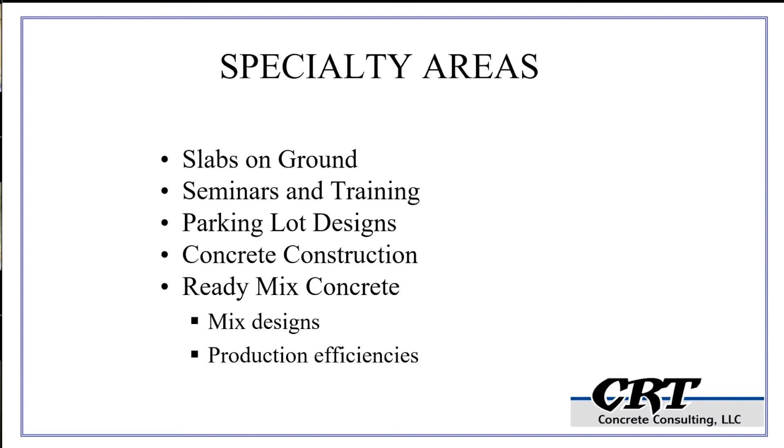Here's my specialty areas, and certainly slab on grade is far and away my biggest business entity. Due to COVID, these big box distribution centers are crazy, out of control — hundreds and hundreds of them being built. I'm working on projects anywhere from Miami to Seattle, California, New Jersey, and kind of everywhere in between. So I do have a myriad of experience. My role on that very rarely is the engineer of record — not really something that I want to do. My services more complement the current design and construction team. So I'm not trying to get into the business segment of some of the good engineers we have on the web with us today, rather just trying to complement what they're already doing.

So we're going to talk about ACI 360. It hasn't been published in quite some time. The current chair is Scott Tarr, and he's working diligently to get a revision out. I've got my own responsibilities as far as that goes, so we'll spend some time talking about that.

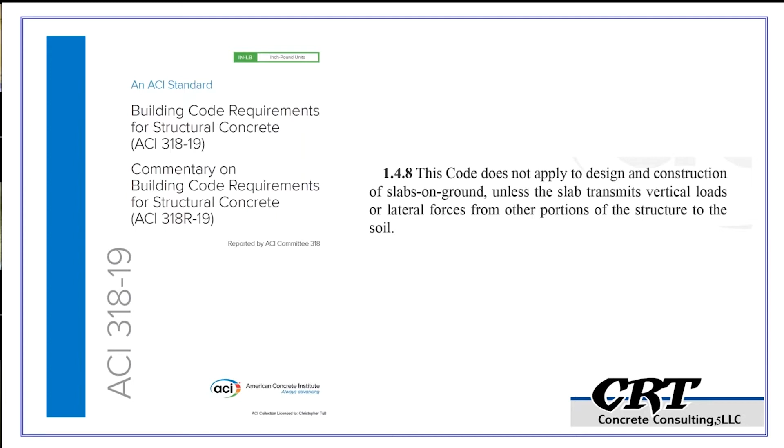But the first thing I want to talk about is ACI 318. Engineers, we love building codes. The first thing you need to understand if you are a designer is that ACI 318 does not apply to the design and construction of slabs on ground unless the slab transmits vertical loads or lateral forces from other portions of the structure to the soil. So we are exempt from the building code. So all you designers who try to put 0.18% steel in the slab and get into a little bit of trouble — don't do it. Put 318 away and come back to our friends at 360. That's where we need to be in designing concrete slabs.

So if you look at the demographics of the voting members of our 360 committee, we've got a good balance between consultants, contractors, designers, general interests, and producers. So we have a very good balance there. It's a pretty good document.

Some of the things in my view are a little clumsy, but Chairman Tarr is cleaning those up, and we'll talk about some of those things as the next version comes out shortly.

Here's the table of contents, and chapters 1 and 2 are the same for most documents, same basic format. We're going to talk about types of slabs, soil supported slabs, and the support system—what we put our slabs on. All our slabs are only as good as what we put them on. We'll talk about loads, joints, design of unreinforced slabs, and design of fully reinforced slabs for crack width control. Frankly, a lot of people get confused and go to that chapter 8 and get themselves in a bit of a bind. We'll make sure we distinguish through those, and I'll mention some of the changes coming up in the current design.

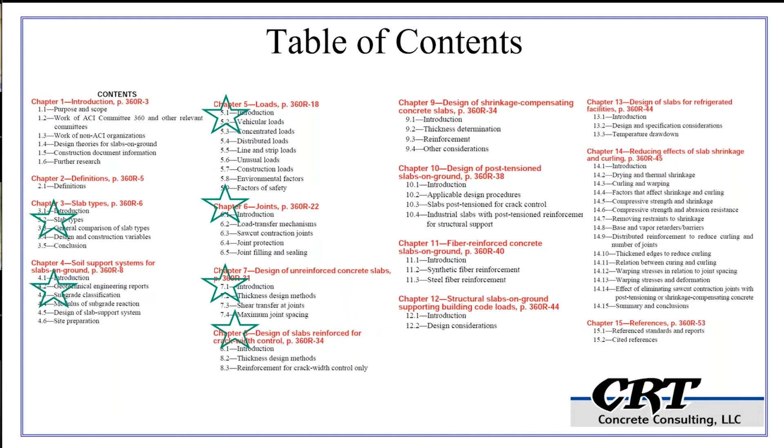So the types of slabs: unreinforced slabs, then reinforced with deformed bars or welded wire fabric reinforcement used to limit crack width control. What's a little confusing about the 360 is if you have shrinkage and temperature steel, light gauge mesh in your slab, you are actually designing an unreinforced slab. That's been a little confusing on some things.

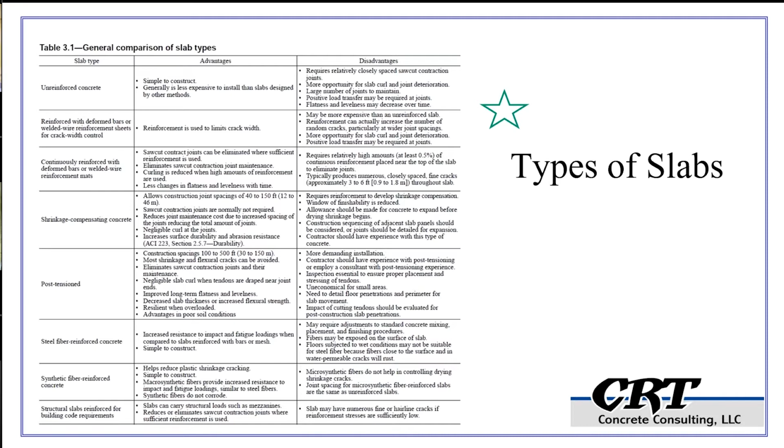Continuously reinforced slabs at 0.5%, we'll talk about that. We're not going to spend much time on shrinkage compensating concrete—those are good systems—or post-tension systems out there. Steel fiber is becoming more and more common, as is synthetic fiber reinforced, macro synthetic fiber reinforced slabs. And then there's building code slabs that hold up mezzanines and stuff like that—we're not going to talk about those today. So those are the slab types in the document.

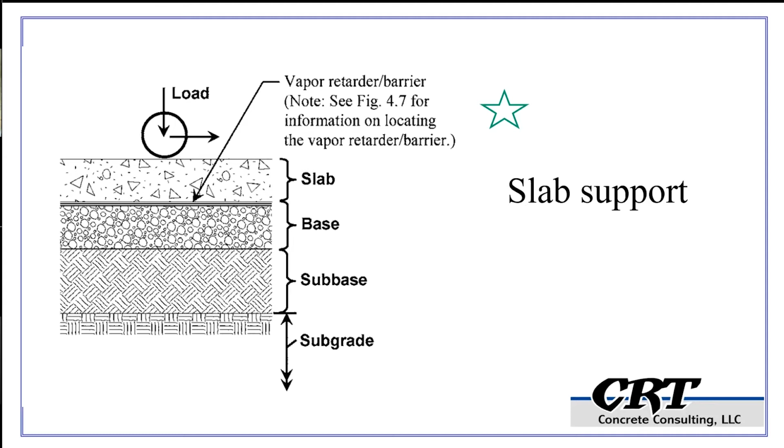Moving forward to talk about slab support, the ACI nomenclature is that the concrete sits on a base, which sits on a sub base, and if you have both, that sits on a subgrade. Most of the time we really don't have two bases—a base and a sub base. Here in Indiana, we might have a slab that sits on some 53 stone, and that works pretty well. More and more often, we're having a vapor retarder under the slab.

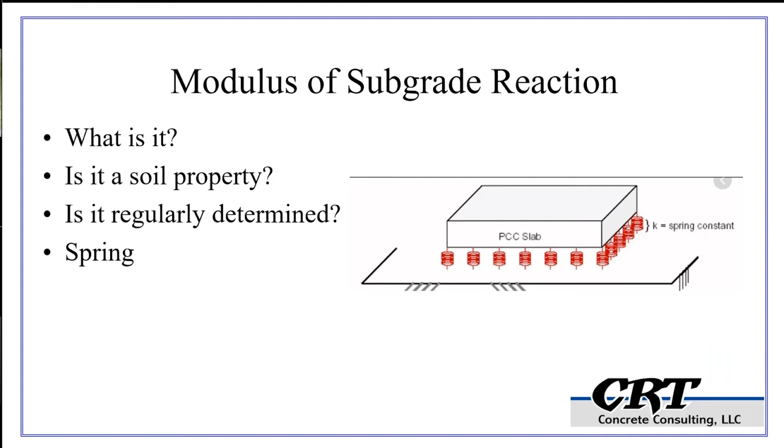Talking about design criteria, the Modulus of subgrade reaction—what is that? It's modeled as a spring constant, like our slab sitting on springs. Do we test for that? No, we don't really test for it. We have some soil properties with associated typical Modulus of subgrade reaction values. A K value of 100 PCI, or PSI per inch, is pretty common. I'm not too concerned with what the exact value is—I'm more concerned that we have uniform support under our slabs, that we don't have a lot of rutting as we go through that.

On vapor retarders, we talked last time in 302 that they're becoming more and more prevalent. I think you're going to see all these warehouse slabs entirely on vapor retarder. One of my biggest clients, that's their standard operation now—the concrete slab sits on a positive vapor retarder to take underlying moisture out of play. We have a nomograph, a flow chart, to find out if you need the vapor retarder. But if you're storing product on the slabs, and more of these DCs have cardboard boxes directly on the slabs, that's why we're putting the vapor retarder in there—to take vapor transmission from the soil out of play with a positive vapor retarder.

There are some pros and cons to doing that. The old thinking was curling was more on plastic—I'm not sure that's true. Curling is more a function of moisture gradient, and I think we're choosing sites now that we passed on 20 years ago. So if you're on a wet site, which we very well may be, your moisture gradient may go down with a vapor retarder, not up, and in fact your long-term curling may be less.

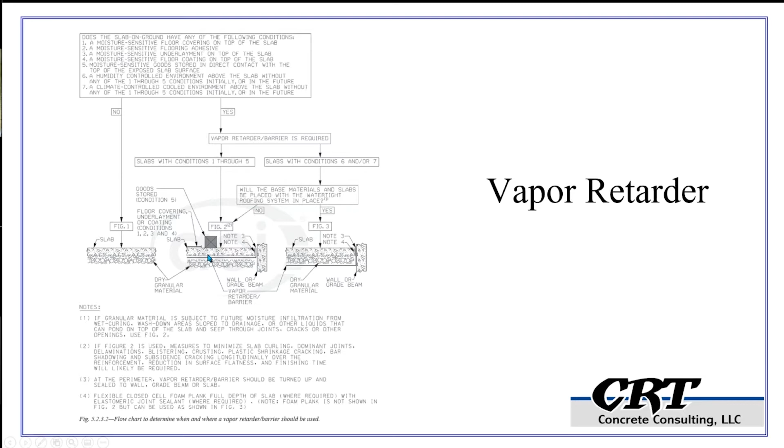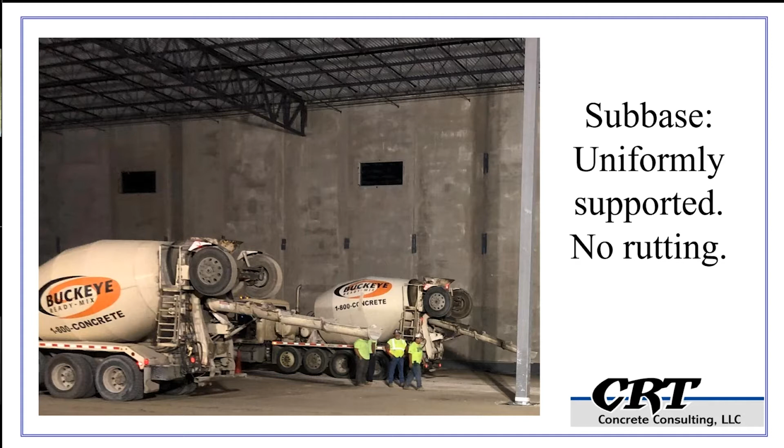So notice that we do have these things, and when we have them we're trying to put the concrete right on top of the vapor retarder. I showed this slide last time, trying to take some out-of-state trucks so I don't show any favoritism to all our friends in the ready-mix business here in Indiana. But we want these trucks moving around on these sub bases without a lot of rutting—uniformly supported, that's good, and that's kind of what we need.

If we look at the subbase issues, there are some issues around the country, maybe not so much in Indiana, but expansive soils can be problematic, moving around, shrinking and swelling with moisture content. There are some large fill sites. Even if you put in your fill in compacted layers, you can have long-term consolidation of those fills, and we need to monitor and measure those.

We don't have a lot of slope slabs here in Indiana, but if you get into northern Kentucky, I worked on a million square footer that had a whole bunch of cut and fill, and they sloped the slab 0.5%. The slab was tilted 6 feet from one end of that big sucker to the other. That can be easily accommodated. One direction slope is not that big a deal, you can't even see it. So that's the subbase issue.

Again, we want it to be uniformly supported. We want to pick an appropriate K value. If you tell me it's a K of 150 or a K of 100, I'm not going to argue with you, those are pretty much the same to me. If you tell me we have a K of 500 or 600, I'm probably going to question that a little bit and find out how we're getting there. Do we have some sort of chemical stabilization, cement stabilization? That's a very high value, not typically seen.

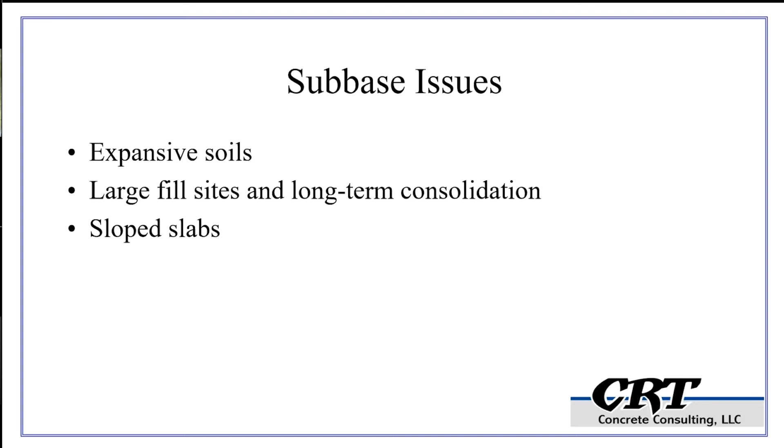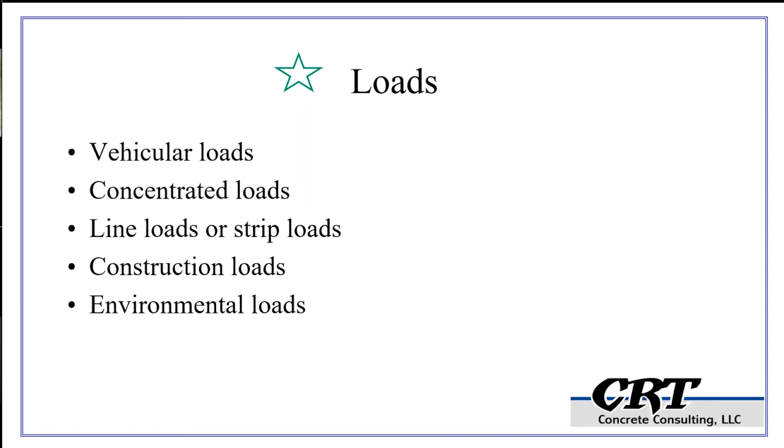If we took a look at the loads, we got a bunch of different loads that we can have on these slabs - vehicle loads, concentrated loads, line loads, construction loads. That's interesting, construction loads not something too well thought out, and I have a couple examples that I can share on how construction loads can get you into a bind. Environmental loads, these are shrinkage and warping. Thermal loads can be significant on some of these slabs, so we'll chat about those a little bit.

So what are the loads? Do we know them? If we're building 750,000 square feet out in Plainfield, do we know the loads that are going in there? We may not. Do you design that slab? Most of the time in Indiana, these warehouse slabs, they're 7 inches yesterday, they're 7 inches today, and they're 7 inches tomorrow. Not a lot of thought gone into some of these, kind of a clear height thing - if the building's this height, we're going to have a 7-inch slab.

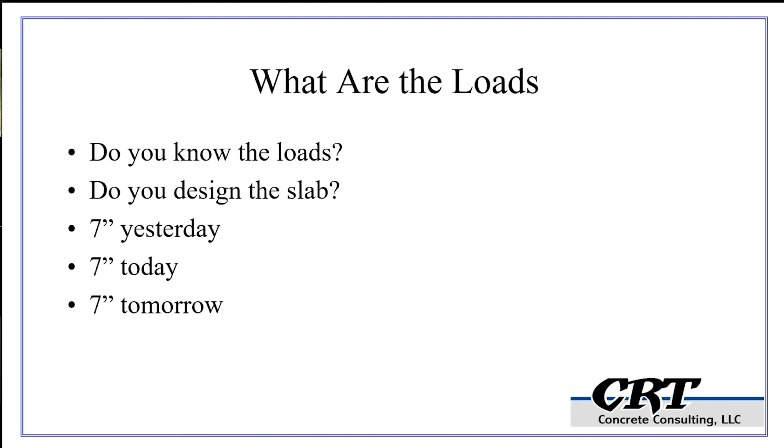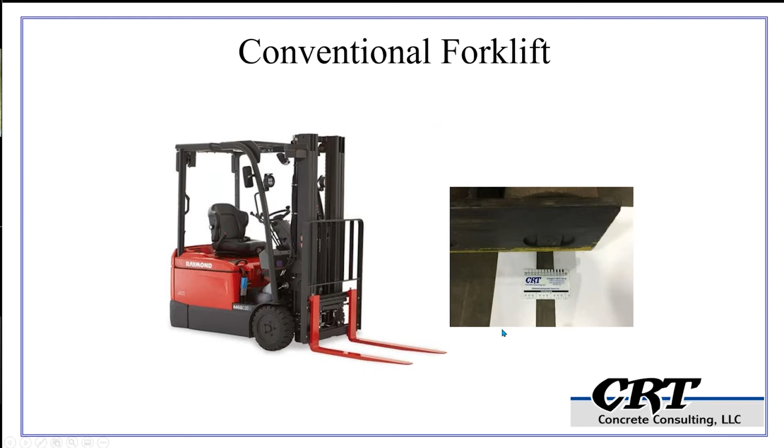So the thickness does depend on the loads. If we talk about these different loads, we look at some of these fork trucks, and if you measure the contact area of these pneumatic tires, not too bad. But if you get into some of these pallet jacks, where we might have a half inch contact area across 5 inches of a very hard plastic wheel, these things with some big loads can play hell on some joints. We're getting these fork trucks that go faster and faster, carry more and more weight, and have harder and harder wheels that can create durability issues on joints and slabs. So we got to understand those things.

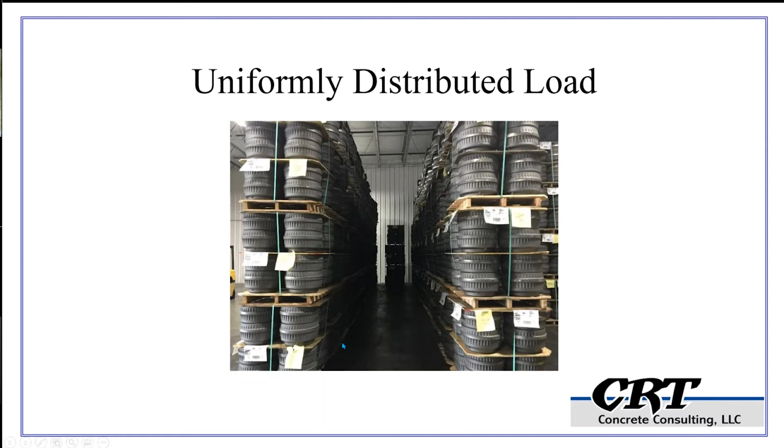We have uniformly distributed loads. This is a project I worked on down in Tell City. The owner of this facility was under the belief that when these brake discs fell over - 1, 2, 3, 4, 5 pallets high - a whole row of this stuff fell over and it chipped the slab. He did not think that his slab should chip simply because these cast iron brake discs hit the floor, but they did. So you can have some uniformly distributed loads there, and you might have some tension in the bottom of the slab underneath these loads, and tension in the top of the slab in between these loads.

So you got to check and see the loads and what you have on each portion. If you have too much tension in the bottom and you get a crack here, no one's really going to complain because you can't see it. But if you get something in between here, then that could be something that you have to deal with.

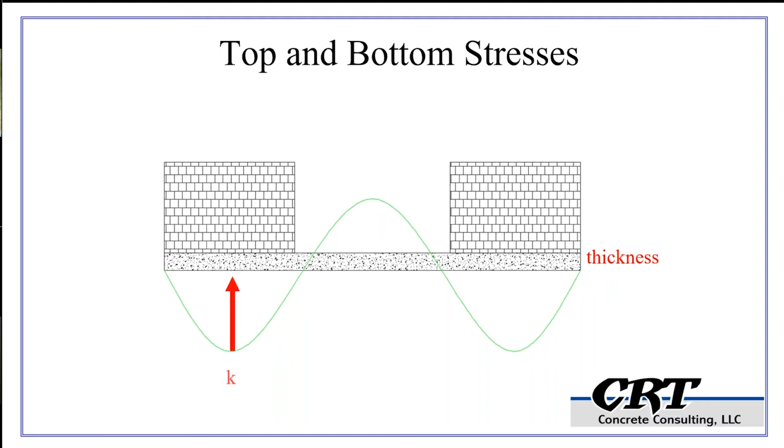So there's the thickness, and then we have our K value resisting these loads, and then we have the concrete properties, modulus of rupture, modulus of elasticity. I find it very interesting that the whole slab design is based on the flexural strength of the concrete, the modulus of rupture. Very rarely are we making beams.

I'm a big fan of molding beams on slab placements. I know they're expensive, I know they're difficult to handle. But typically what I see is we kind of have a default thickness, pick a number, 6, 7, 8 inches. Then when the developer gets a tenant, they might want to come in there and rack it, and someone will ask the engineer of record, hey, can we handle these rack loads? And when we go to calculate these things, we're using the modulus of rupture, the flexural strength of the concrete. If we don't have it, then we take an educated guess, and being engineers, we typically guess low.

So I'm a big fan of certainly monitoring the concrete strength with some compressive cylinders. And then I kind of throw out there that on my jobs I prefer to have one set of beams per slab placement, and have that set of beams taken from the same loads as one of the previously mentioned sets of cylinders. So we can kind of make a correlation between compressive and flexural strength, and we can have that information. So if we do have a big post or a racking or a mezzanine going in on the slab, then we'll have a little better information when we do some design.

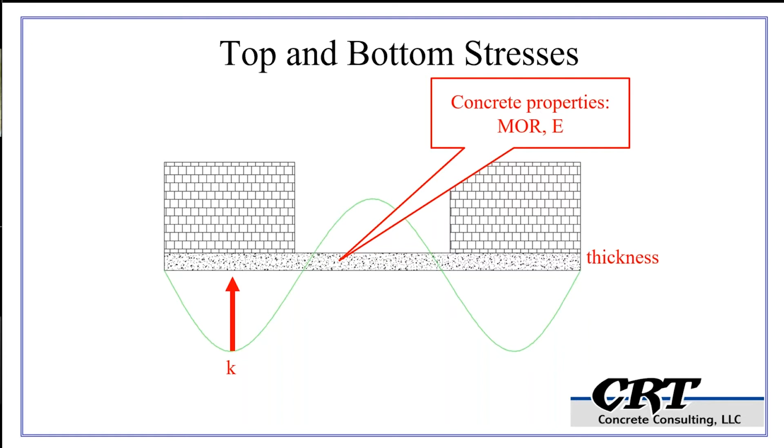So there's the loads. We could have a single post that can create some tension in the bottom of the slab, and then we have these rack loads that go in here. These are becoming more and more common. Never met a rack manufacturer that said the slab couldn't handle the racks. We'll talk a little bit about that. But racking loads are certainly getting to be more and more common.

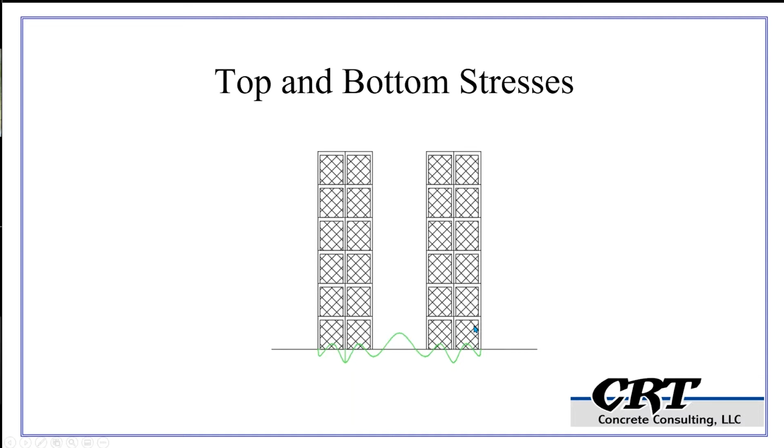So if you look at some of these rack loads, we can have some tension underneath the post. We can have some negative moment, top of slab tension in between the racks, and we can even have some tension under the racks at the top of the slab, depending if you're putting product on the slab or not. So these are some typical loads, and this is kind of what some developers would go with and say, hey, this is what my slab can handle based on these loads. We'll talk about design as we work our way through. So those are typical loads that go there.

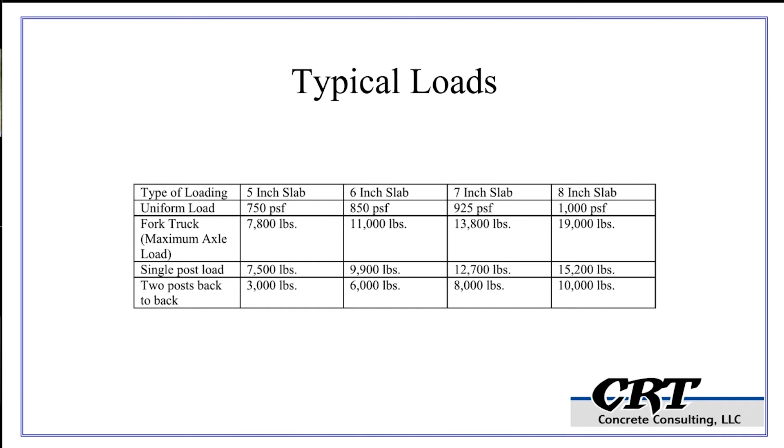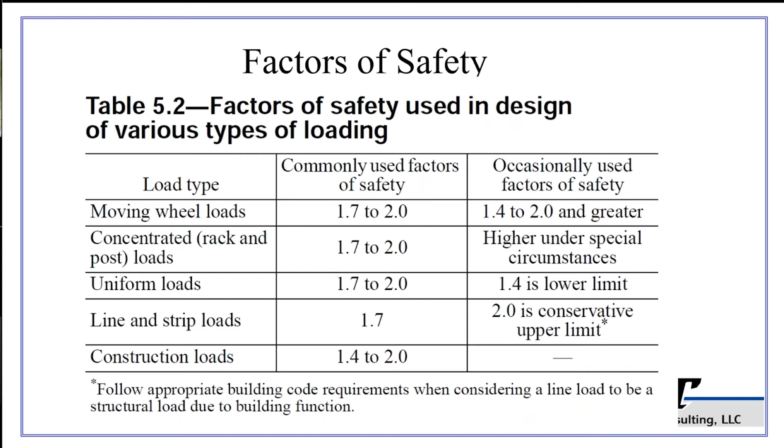360 does have some typical factors of safety, moving wheels that are 1.7 to 2, and if it's commonly used you can read that - those are different factors of safety. Kind of 2.0 is the upper limit on that. So if you have line loads or other structural entities, you got to go back to the code. But these are just for soil supported slabs. So some typical factors of safety that are used.

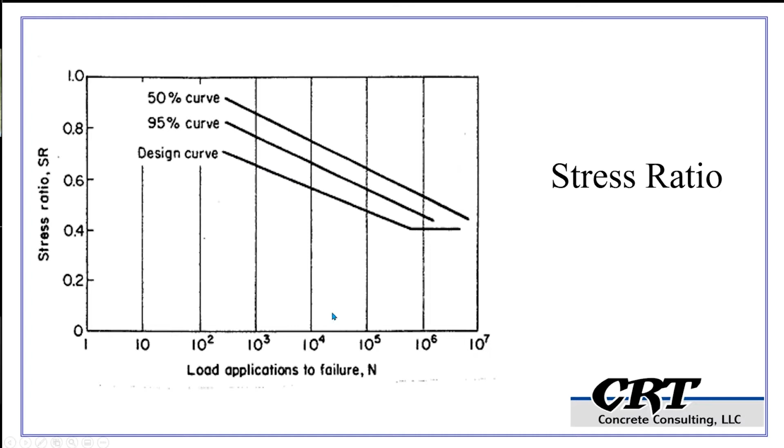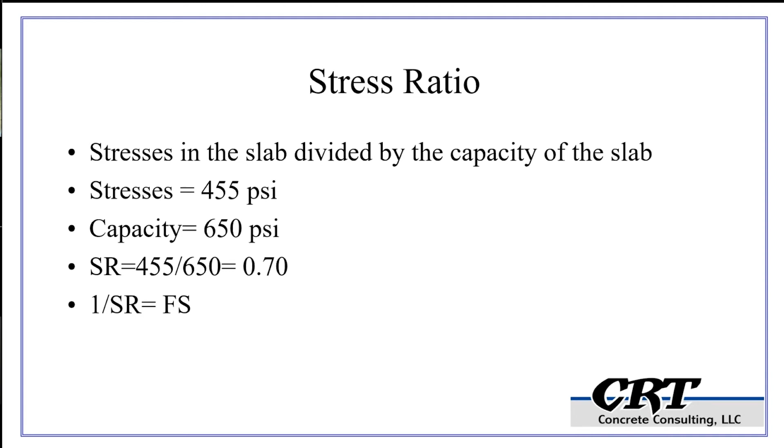So I do want to mention something called a stress ratio and how that can be used. PCA created these design curves for fatigue, and depending on the stress ratios, you can determine how many repetitions that you can take. So say that you take the stresses in the slab divided by the capacity. If we had 455 psi of stress and we had a capacity of 650, we'd have a stress ratio of 0.7, or a factor of safety of 1 over that, of 1.43. So if we have a 0.7, then if you go to the design curve, you can have 100 repetitions of that kind of load. There you go, stress ratio of 0.7.

So any questions on the loads, on some of those loads? Larry, any questions?

No? All right, I got to look and see if I can see the chat room. I don't know if I can. Yeah, I can. All right, I'll leave that up.

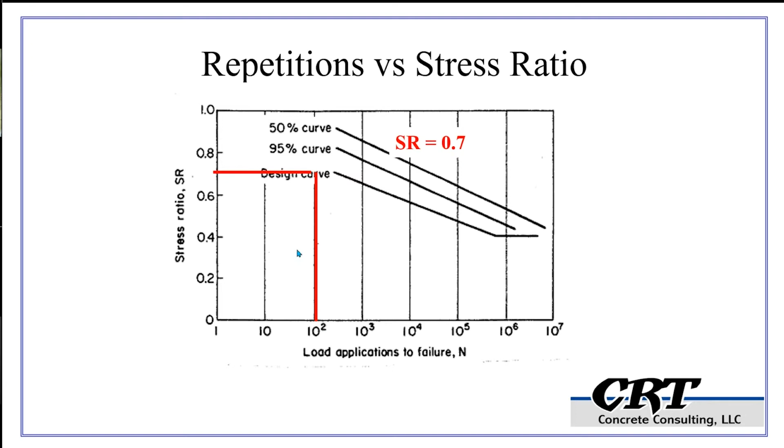So environmental loads - as we talk about environmental loads, curling and warping can be an environmental load. I've done some finite element work on this, and what's interesting is, say you've got a 7-inch slab, which is kind of typical here in Indiana, you might use 250 psi of that capacity simply to support the curled slab. So it eats away at the capacity of the slab, and that's something you need to be aware of.

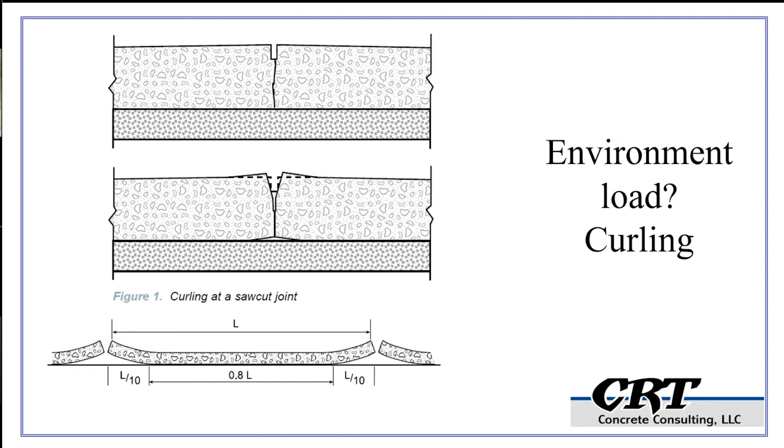We can reduce curling by saw cutting. We can reduce shrinkage and curling by mix design - we talked about that last time. I think the industry is doing a pretty good job of that. I don't think we really understand curl as well as we could, but we kind of manage curl by having higher factors of safety, and we get away with some loads without having too terribly many problems.

So I don't see anything in the chat room, so I'm going to move on and talk about joints. But before I do - oftentimes the designer does not have the load.

The developer and the marketplace dictate thickness. This big box slab business is an interesting business - the only market segment I've been involved in where no one wants to differentiate themselves. They all want to kind of be the same and compete in the same space. So when someone says, 'Hey, everyone thinks this should be a 7-inch slab, can it be 6?' and I say, 'Well, what are the loads?' they say, 'Well, I don't know.' And I say, 'Well, then I can't help you - if I don't know the loads, I can't really tell.' Now, I can calculate the capacity of a 6-inch slab, and you can communicate that and say, 'We'll build you 6, and this is what you can put on it.' But having these loads, particularly on a spec building, is something that's not readily available.

So if we move on to joints, let's talk about joints. I do a fair amount of troubleshooting as far as slab consulting is concerned, and very rarely am I looking at cracks in the middle of a slab - I'm always looking at problems at joints.

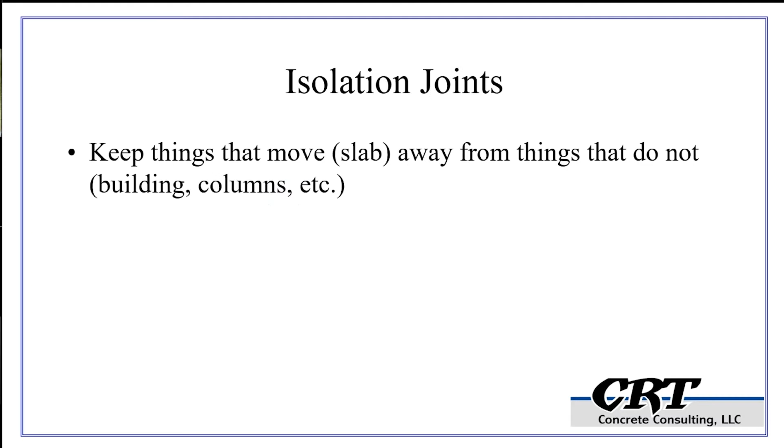So jointing is something that needs to be designed, and designed properly. We have isolation joints that keep things that are moving away from things that do not. 360 has some column isolations in here, and I am a big fan of simply just wrapping columns, particularly these HSS columns, wrapping them with foam expansion joint material and pouring right to them. I will say we do want to make sure we don't have the anchor bolts from the base plate up into the slab - we want the slab to move independently of these columns.

We saw cut right to the column. It works real well. I've got some markets that say if you do not pinwheel, you will get cracks off of the square HSS columns. Here in Indiana, we typically do not pinwheel - we saw cut right to the middle of the column and don't seem to have a lot of problems with that. You can do diamond isolations if you like.

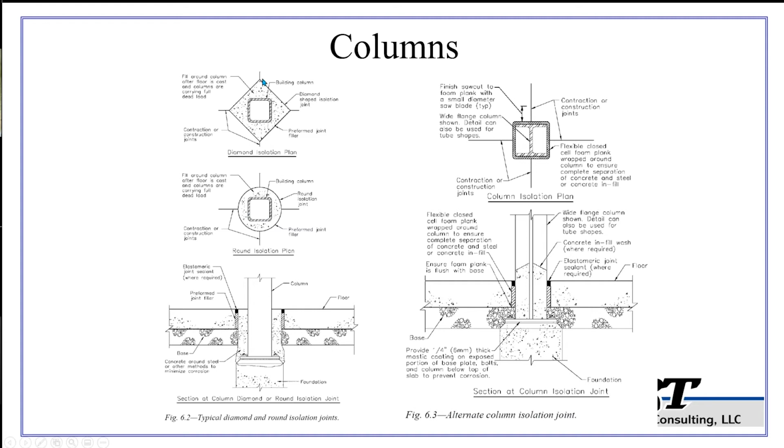I'm not a big fan of the diamond isolations, because you're going to build those things, the slab's going to curl, and the owner's going to call me out there and say, 'Hey, my building's sinking, my columns are sinking.' When in fact, the columns aren't sinking, the slab's just curling up a little bit around the isolation. So I don't like to do those. We do isolate maybe some wind bracing columns, some things like that. I'm a big fan of round or hockey rink shape if we need to have some isolation. So these things are done, but if we don't have to have isolations, it's a much cleaner look. So that has to be said.

I like to have expansion joint material between the slab and some walls, if we're doing that - I think that's important to allow for some movement. It doesn't necessarily need to be 1/2 inch, could be 1/4 inch, but I would rather not have the slab sticking to the walls.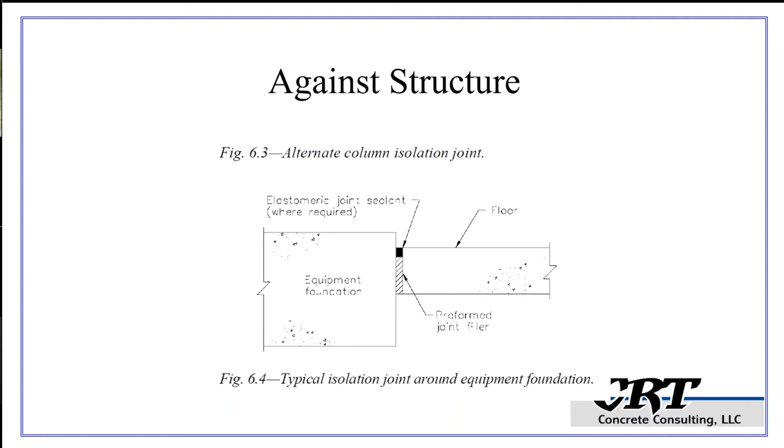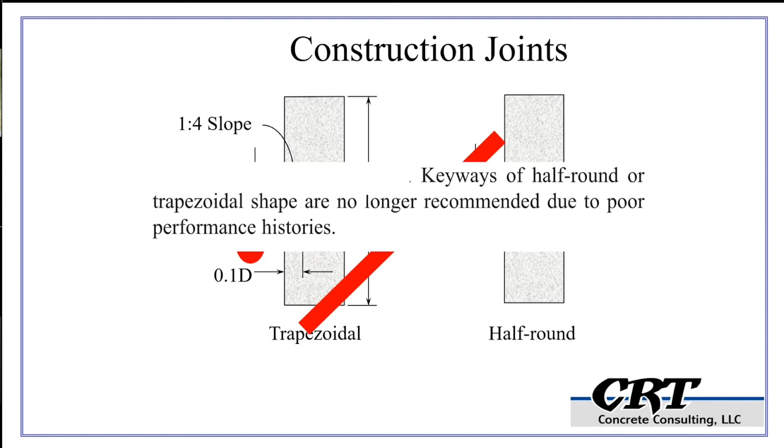Keyways are no longer recommended. We're not doing keyways anymore, so please don't do keyways. Don't do keyways with dowels through them. Don't do keyways with tie bars through them. Save your keyways for - actually, I'll take that back - don't save your keyways for anything. Don't use keyways, don't use them in pavements, don't use them in slabs. We're not doing keyways anymore.

What is very clear in ACI 360, and a lot of engineers and contractors get bit by this, is if you have rocking slabs. This is very clear in 360, and it's been quoted in court cases quite a bit. When the designer cannot be sure of positive long-term shear transfer at the joints through aggregate interlock, then positive load transfer devices should be used in all joints subject to wheel traffic. So what does that mean? If you don't think you can have aggregate interlock, and if you have an unreinforced slab, you probably don't have aggregate interlock, then you should have positive load transfer.

Well, what does that mean? That probably means dowel baskets. Dowel baskets are very, very expensive. So what I try to do in my business is educate the owner and say, hey, this is what ACI says about load transfer. And if having a couple panels rocking around a little bit is going to be a big issue for you, then we need to talk about dowel baskets.

Well, what do dowel baskets cost? They might be $250,000. Oh, well, what if I have a couple panels rocking around? Well, we can go in there and seal the joints, or we can under-seal these rocking panels. What does that cost? You might have 20 grand in that on an isolated instance. So I can skip the 250 and I might have to do the 20. Yeah, well, that sounds like a better business decision. That's fine with me. It's just my job to educate you and make sure you understand what may or may not happen with that slab.

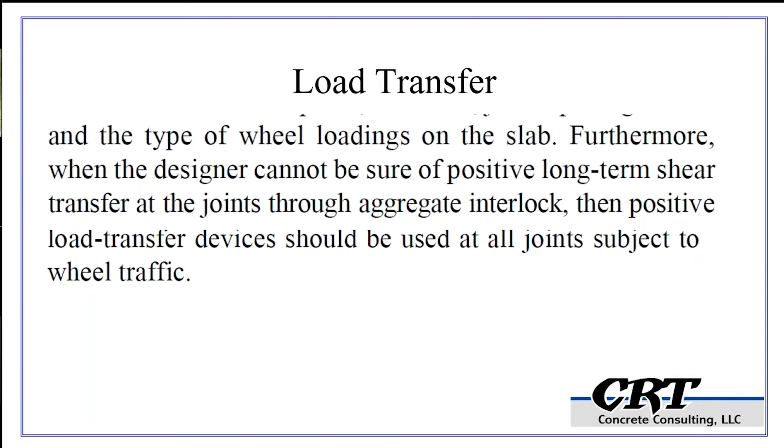So we have different types of load transfer. We've got the diamond dowels, plate dowels, square dowels, round dowels. We can get all these different things in baskets and use them as we need to use them. The plate dowel has certainly been the most common. I like the plate dowel because it can allow for two degrees of movement, where round dowels generally only have one degree of movement. These are figures right out of the current ACI 360 document.

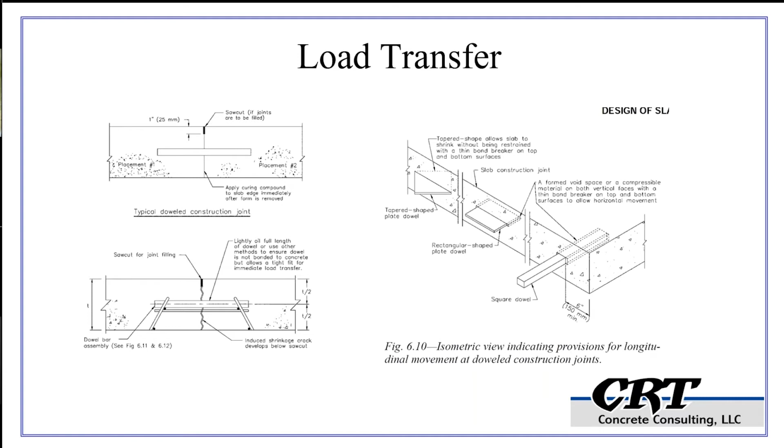So again, typically what I see in the slabs is almost always, or maybe always, we have load transfer at construction joints. Typically they're plate dowels these days. Do we have load transfer at contraction joints, or the saw cut? We might have some sort of load transfer in the speed bay, but in the rest of the slab, typically not. It's typically unreinforced slab throughout the slab. And then we have that conversation on, if we do have some rocking panels, what we maybe had to do to address that.

Buried deep in the joint chapter is this notion of enhanced aggregate interlock. Enhanced aggregate interlock is running a small amount of steel through the saw cuts and having that steel hold those joints together and getting some aggregate interlock. This is happening more and more, and I'm a big fan of this, particularly in the speed bay. What I typically see is the engineer of record needs to have some sort of steel in the slab along the perimeter of the building, particularly at the low footings or the dock walls, the tall walls, to create enough dead load from the slab to handle some thermal bowing stresses in either his tilt panels or his precast panel. I like to take that same steel creating a dead load situation and create enhanced aggregate interlock, particularly at the speed bay. So we're seeing this more and more.

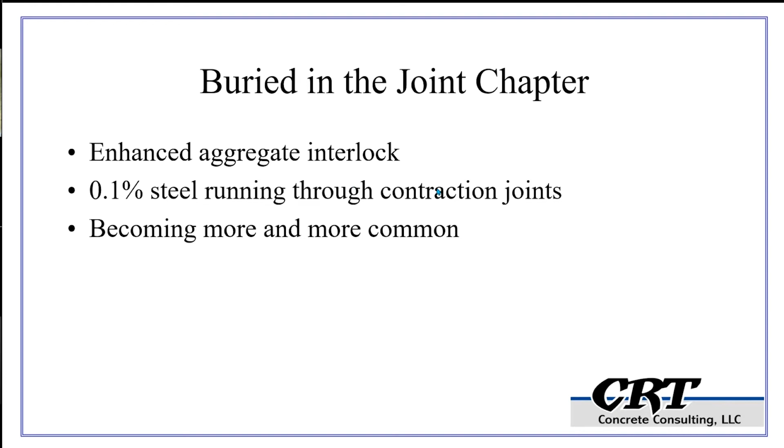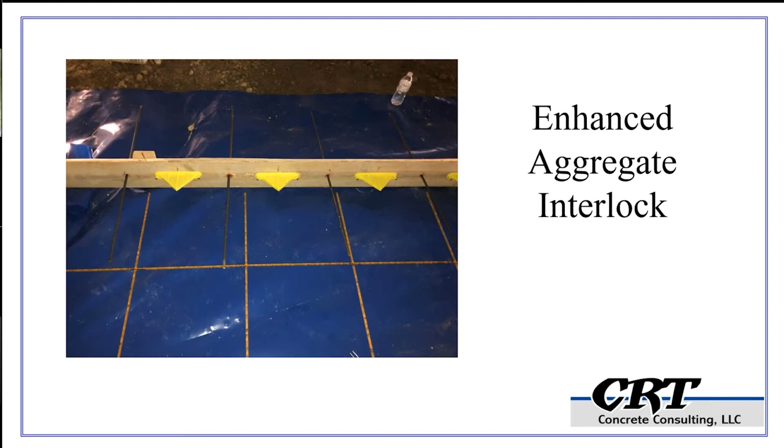So what we've done is modify the construction joint detail. These are diamond dowels, 18 inches on center. We run a mild bar, about 0.1%, a number 3 bar, through there, and we slightly tie that joint together to keep those construction joints from opening up, so we don't have these large dominant joints in the slab. There's a picture of that modified construction joint detail, a little sketch you can steal shamelessly and use as you like.

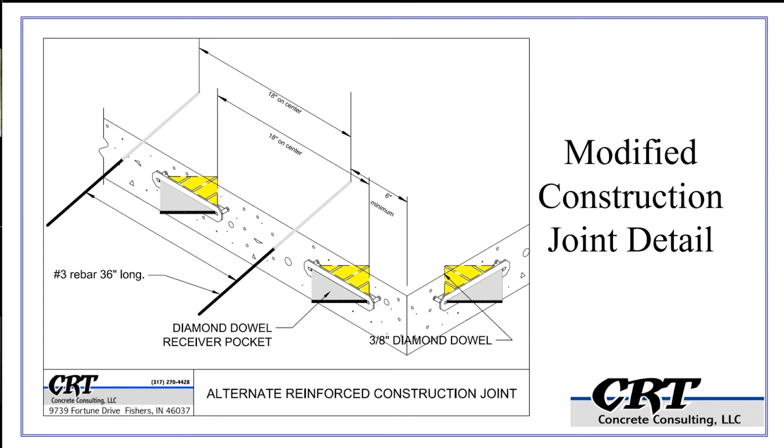So that's the joints. If you go with these contraction joints or joint spacing rules of thumb, you'll be in a low curl situation. If you have a 6-inch or greater floor, joint that baby 15 feet on center. If you had some weird spacing like 62 feet, I wouldn't cut it up. If you had to do 16 feet or 15.8, there's kind of a guideline on that. But if you go by these rules of thumb, you'll be in good shape.

Make sure you saw deep enough. Watch your aspect ratio. If you do these kinds of things, it's really effective in minimizing, not eliminating, curl problems.

So if we've got some 0.1% in the speed bay where the fork trucks are running up and down, we've got some sort of enhanced aggregate interlock load transfer, and the rest of the building, it seems to work out pretty well here, certainly in central Indiana.

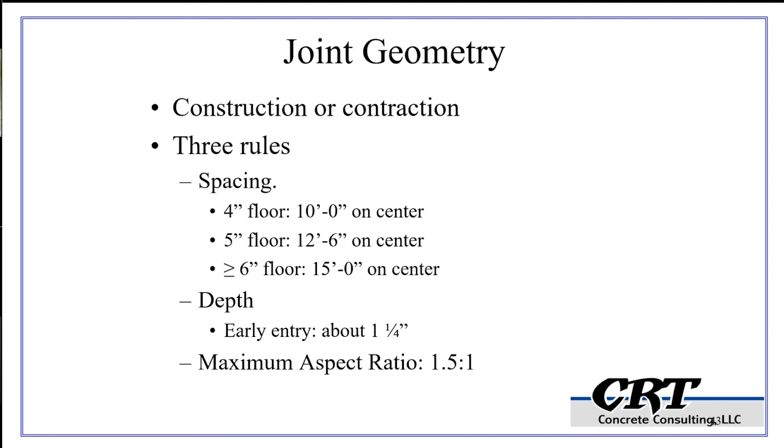So keep that in mind as you design that thing. Now, oftentimes this is where the designer gets hung up a little bit. The thickness is kind of easy — we're kind of guessing on it anyway, or the market determines the thickness. It's how these joints are done, how these details are done, and how the building is tied to the precast or tilt wall panels. All those nuances are kind of what makes or breaks a successful project. How you handle the docks, all those different things, kind of makes or breaks a good project from a bad project.

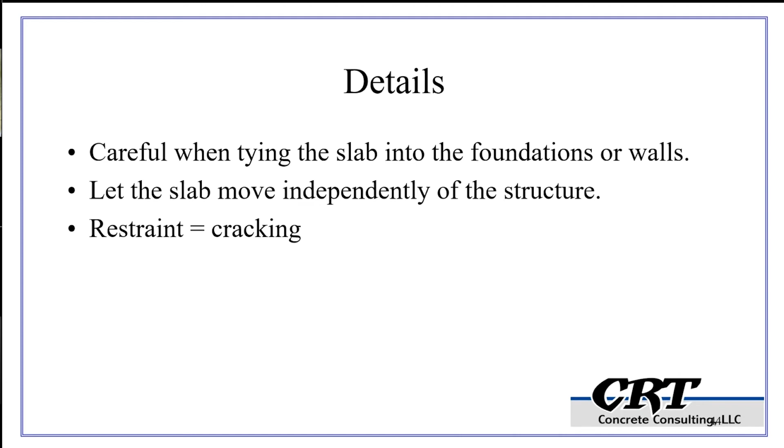So again, be careful when you tie into the foundation or the walls. What I like to do is let that slab float, let it move around, move independently from other objects. If we can minimize restraint, we can minimize cracking. So that's kind of my philosophy — let that slab move around a little bit.

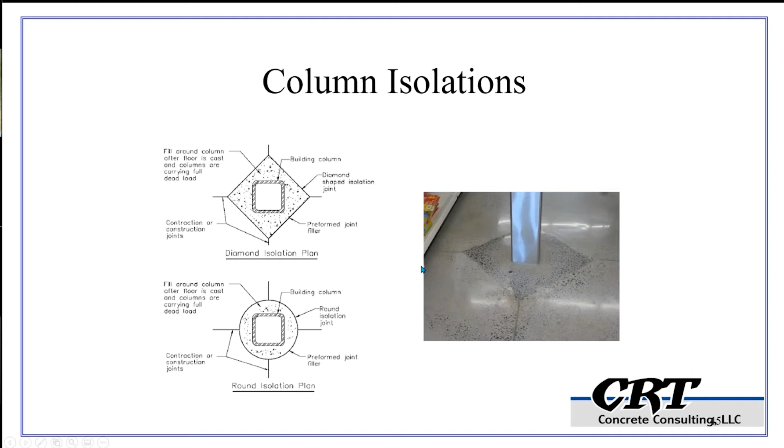So here's a column isolation, here's a blockout — I think they look terrible. That's a polished job, I showed this last time. I think it's better than a diamond, but again, I'd like the contractor to finish those off. Everyone tells me in my pre-placement meeting, yeah, we're going to finish those off with an angle grinder. Sometimes they do, sometimes they don't. A little bit of TLC.

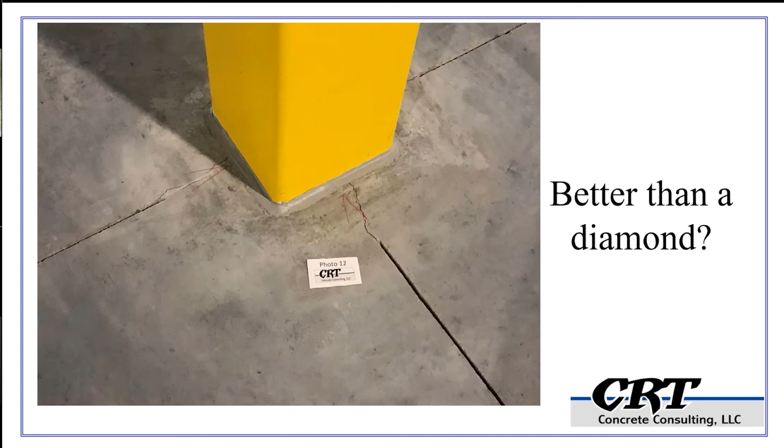So you can see the elastomeric joint sealant around that HSS column and the Mastermec sealer that's over the foam, the expansion joint material. Makes a pretty clean detail. If you're doing tilt-up, I'm a big fan of column sleeves — the detail ends up looking just like that rather than the blockouts.

So that's that. So any questions coming up? I don't see anything in the chat room, but I will go into design if we could talk about design. So give it a minute, but I don't see anything popping up here. All right, okay, all right.

So design of unreinforced slabs — let's talk about that. The typical Westergaard analysis has 3 conditions: corner loading, edge loading, middle loading. Certainly something you can look at with a Westergaard analysis. PCA's got design material, design guidelines. Corps of Engineers does too, and the Wire Reinforcement Institute does as well.

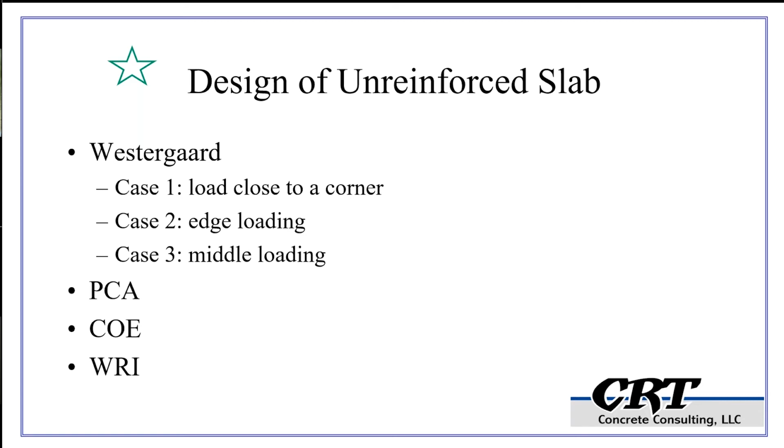So if we look at how thick that is — Scott Tarr and Jim Farny wrote the latest Concrete Floors on Ground book. It's a pretty good book, and there's some nomographs in here that Tarr put together. You can do some design based on this fork loading design. Notice he's got one for edge loading and one for interior loading.

No corner loading — frankly, the corner loading is so high that you can't really afford to build a slab with corner loading. Having a true corner without any load transfer in a building is very rare to have that kind of loads. Corner loads are kind of in the perimeter against walls where you don't really get these bigger loads. So these are the nomographs.

These are the nomographs, so you figure a stress ratio, and the PCA guide walks you through that. You enter a stress ratio, get your contact area, then go down to your wheel spacing, run over and hit your K value, and you have your slab thickness. Very, very intuitive. These were built using finite element.

Tarr did about 2,000 FE analyses and put these nomographs together. Some people use these things, I use them on occasion, so there's nothing wrong with that. There's a pretty hefty factor of safety built into these things, I think a factor of safety of 2. So they generally work pretty well, but they are conservative.

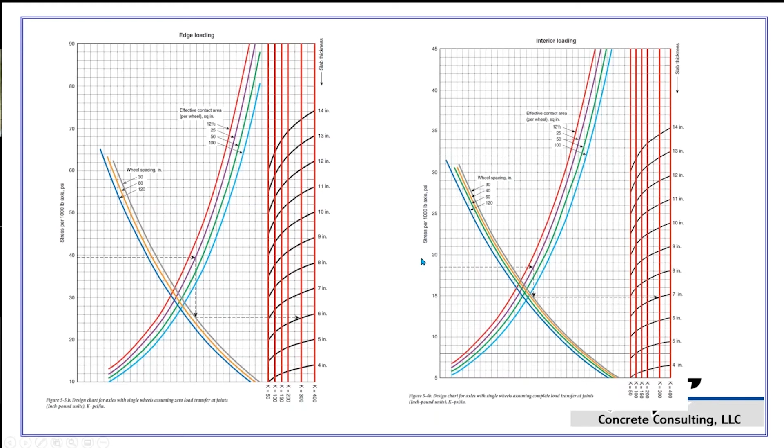Let's see what we got here. There's also some nomographs for some rack loads and post loads, same kind of concept. You got some X direction, some Y direction, then you go in there and hit some spacing. You go over to your K value and contact area, and you get a slab thickness.

So works out pretty well there. There's some allowable random non-uniform loads capacity. Again, you go in with your flexural strength, you got some K value, and you can see what is the allowable load in pounds per square foot that a slab can handle based on these different K values and thicknesses. Kind of a quick and dirty design tool. I use this quite a bit, as they say, hey, I've got some pallets all over the place. You put some weight on that, and then you can kind of get an idea of what your slab needs to be.

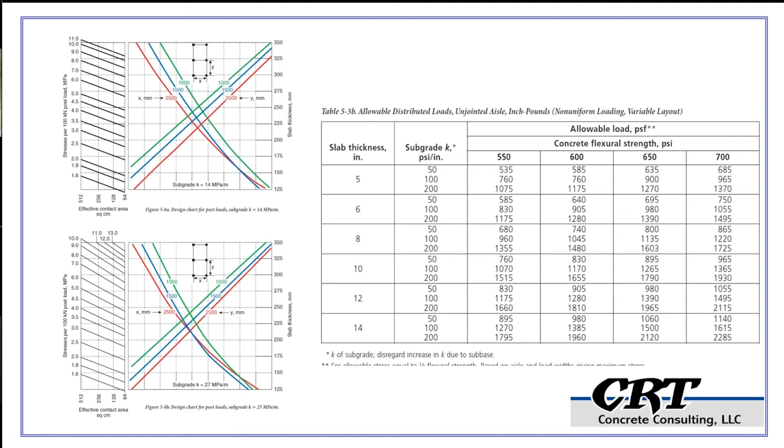So that's a very good guide, that PCA guide's good. Wire Reinforcement Institute's got some design methodology. I would caution you in using the subgrade drag theory and getting those joints extended too far out. Some of the mesh guys say, hey, you put the steel in there, you can extend the joints. Not a big fan of that. I stick to that 6-inch thick for 15-foot joint spacing. I stick with that pretty well.

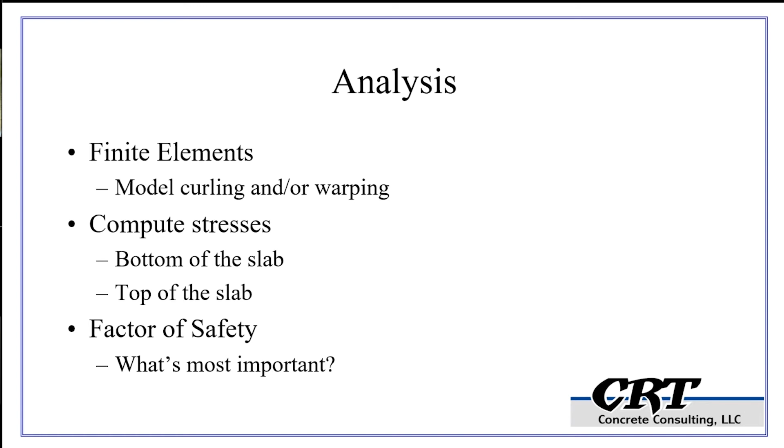All these design methodologies kind of come down to the same thing. More and more common these days is finite element analysis. I'm going to talk a little bit about this today, and talk about how you can model curling and warping. I do that, and you can compute stresses on the top of the slab and the bottom of the slab, and then talk about factor of safety and what's important to you.

So you might have a building with a bunch of conditions there, and one of the conditions could be an area that has this kind of loading. I go through and model this thing, look at the stresses, and you do an assumption on thickness, and that's how you model this thing.

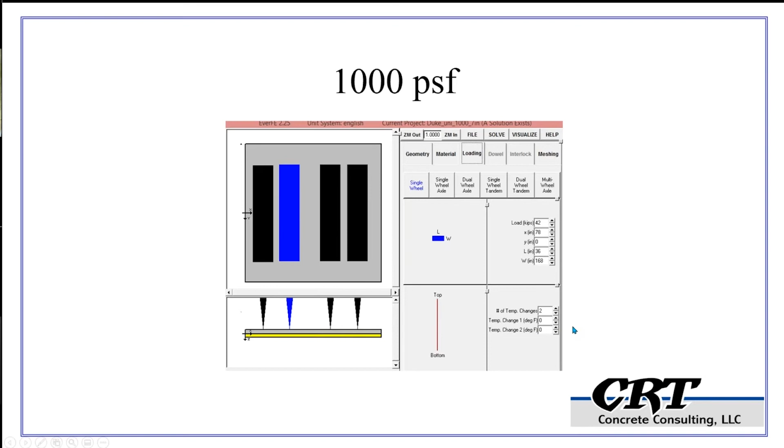Now in this analysis, I modeled it without any curling and warping. The way that curling and warping is modeled is through a thermal change. A thermal change and the warping of a slab due to thermal would be the same as drying. So I know how to change these temperature differences to get a certain amount of curl. I can model an 1/8 of an inch of curl or whatever we're doing, and I can model the different joint spacing and all this stuff to come up with these stresses. So that can be done with the finite element.

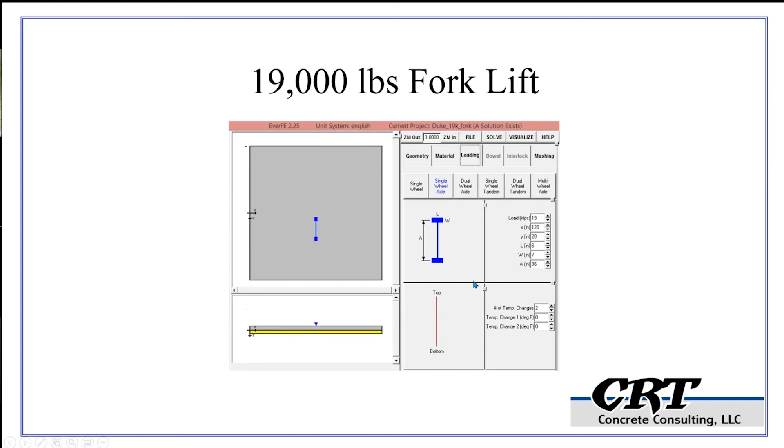So here's a fork truck, a 19,000 pound fork truck on 2 wheels. We've got a 6-inch wide wheel that's 7 inches wide for a contact area of 42 square inches. The wheels are 36 inches apart, 19,000 pounds. Put that on the slab, and here's the stresses on the interior. Top of the slab, hardly any stress.

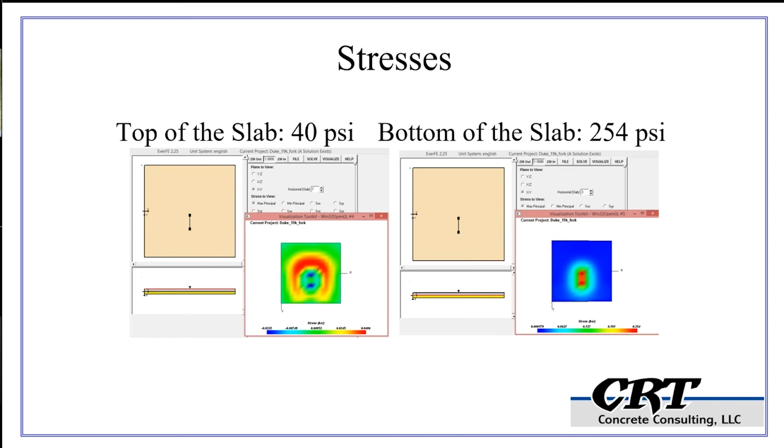At the bottom of the slab, we got 254 PSI. If you took that over a corner with some curl, the load is 250 PSI, maybe the curling is another 200, so you might be at 450, getting up near the capacity of the slab. You can model these things with finite element.

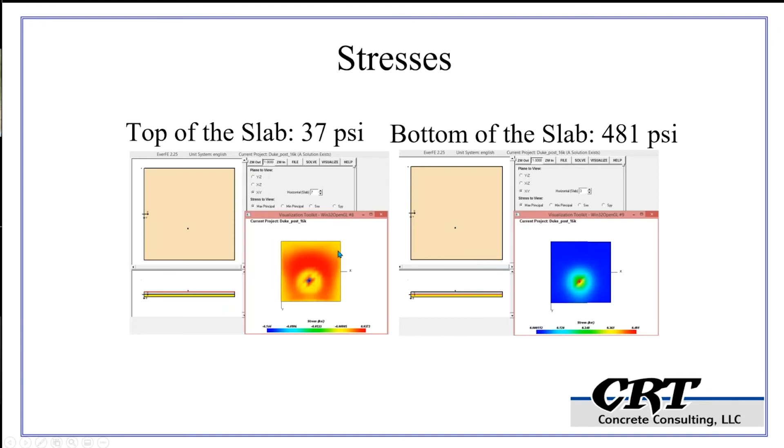So here's a single post load. Here's the 16,000 post on a 3x4 plate. Again, top stresses, bottom stresses, you can see the things are getting higher and higher.

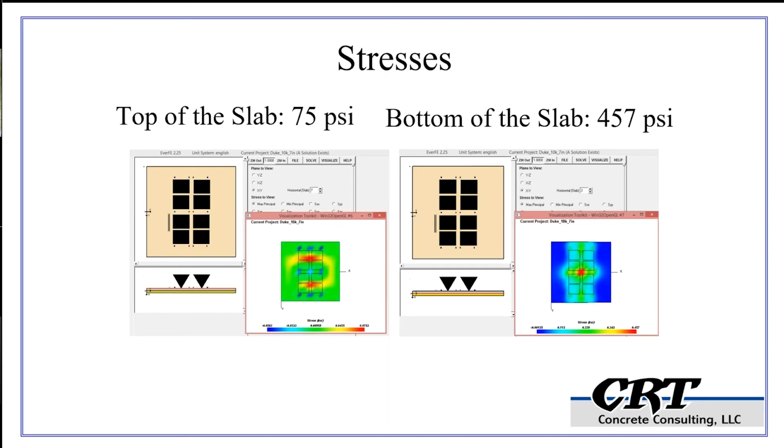If you have some very high rack loads, you can have very high stresses in between the racks. And if you exceed your modulus of rupture, you can crack the top of the slab, which is not a good thing. So I tend to have a higher factor of safety on my top-of-slab stresses, negative moment or negative stresses, because I don't want a crack on the slab. It's a perceived defect. So again, a good way to model some of these stresses.

Some of these FE tools, the one I use is EverFE. It's free, kind of a pain to deal with, but a lot of structural engineers have these finite element tools they use quite a bit, and a lot of them have designed-in factors of safety. Again, I use a higher factor of safety where I can see cracks than where I don't see cracks.

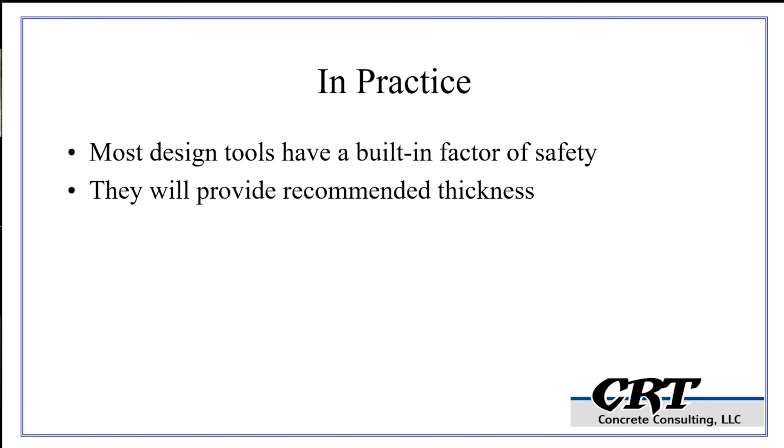So a couple of guidelines I'd like to throw out that I've learned over the years: two people you cannot allow to determine your slab thickness. I'll start with the second one — you cannot let your rack guy determine your slab thickness. These rack guys, they'll say my racks can hold 20 million pounds.

Okay, and I'm going to design a slab — now it's going to be 14 inches thick. Well, is anybody going to build a 14-inch thick slab? No.

Are you going to use the full capacity of your rack? Probably not. So what I like to start with is a pallet weight. How much does the pallet weigh? Okay, I know the pallet weight. How tall is the building? All right, I know how tall the building is. So you're physically limited by how many of these pallets can be stored on the rack. Therefore you have your rack loads. That's kind of how I like to determine the rack loads, using pallet weight and building height to come up with some reasonable numbers.

If you let the rack load determine that, you're going to be way too thick. And again, the fork truck guy will say, hey, my truck is capable of holding 10,000 pounds. All right, but I'm only picking up two 500-pound pallets — that's a whole different loading environment. So we've got to work through those issues. If you design to the capacity of the racks and/or the fork trucks in the building, you're likely going to be way too thick, way too conservative. And the concrete and cement industry will thank you, as they'll have some very beefy slabs.

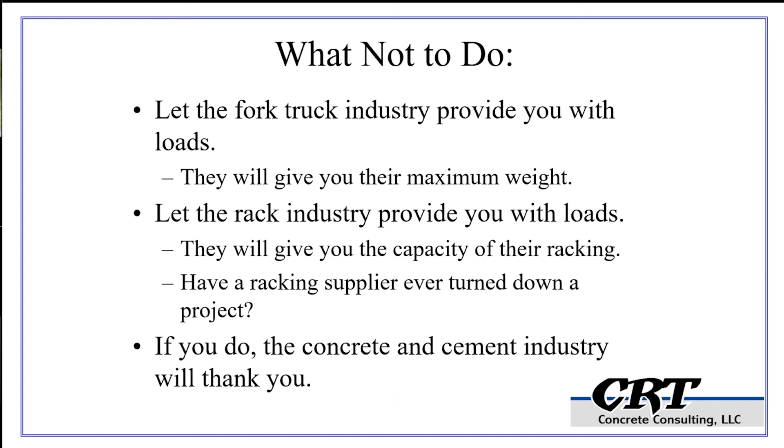So definitely the racks do control. Back-to-back is where you start, and that's going to probably be your controlling factor on the slab.

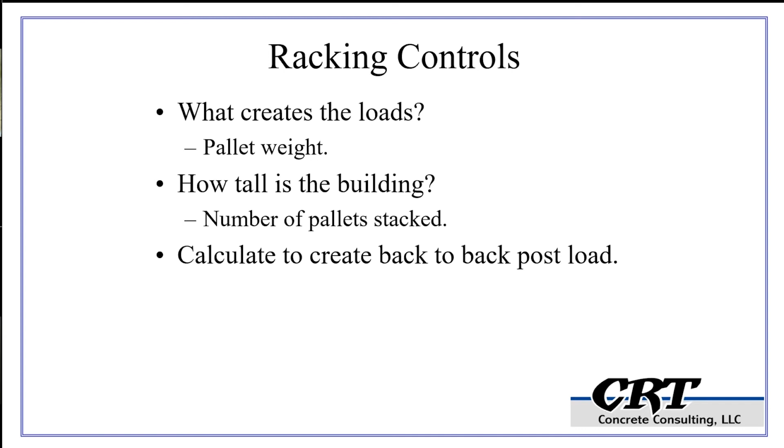Any questions on design of unreinforced slabs? I don't see anything in the chat room. I don't know, Larry, are you still with us here?

Yes, we've got one question from Steve Spitzer — he wants to know what software you're using for your examples. EverFE. It was made by the University of Maine.

And it's based on highway. So if you see it says wheels, what I do is I fake this into being a base plate for different kinds of loads, but it's somewhat limiting. I can only put the load in kips. So if you tell me it's 7,500 pounds, I put it in as 8 kips. But it seems to get the job done.

I know there's different finite element programs, and some of them are costly. Some structural engineers have these FE programs to design their steel or concrete frames, so they have that resource to do the slab design as well if they'd like. I'm too cheap to spend 10 grand. For the limited amount of slab work I do, this EverFE seems to work pretty well for me.

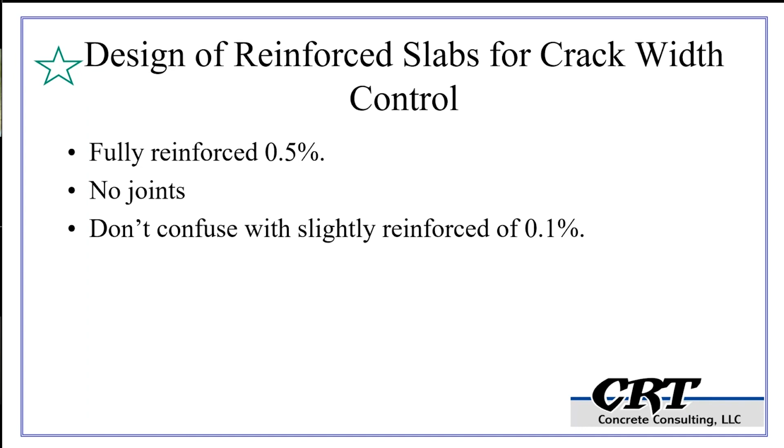Make sure you have a handle on those thermal stresses. I'm not a big fan of building these extended joints outside, like in a tilt-up environment. If you're in late March, early April, you might be 35 degrees in the morning, and 4 or 5 hours later, you could be 65 degrees. Some of these systems don't handle these thermal changes as well as others. I'm not telling you I'm an expert on the stresses created by thermal - I don't think it's very well understood. But when you're jointing just at the column lines, every other column line, when you have 150 feet or 100 feet of concrete, those thermal stresses can be significant and can result in cracking. So be aware of those.

So as I kind of wind up, I want to share some issues that I'm seeing in the market. Again, on these big fill sites - careful of your K value and careful of your long-term consolidation.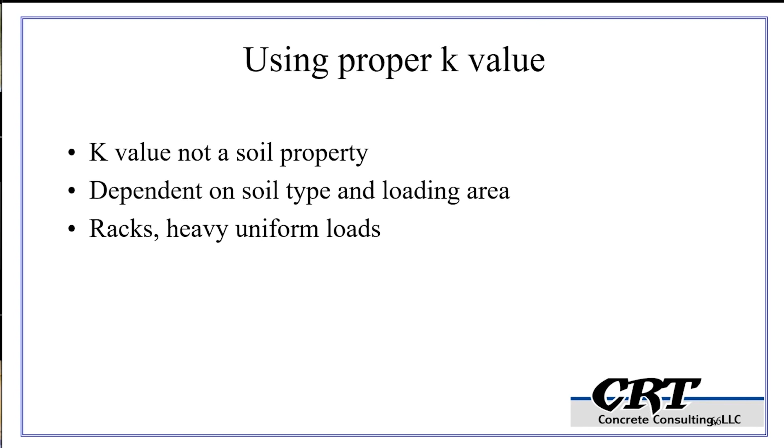This is a job I worked on in South Bend, a troubleshooting job. I would walk down the middle of the aisle, and we had a crack down the middle of every one of these aisles. A couple of the aisles didn't have cracking, and after looking a couple hours I finally figured it out. I started talking to the people, and they said, yeah, this was 10 feet of fill, and we put that fill in there and started building on it right away. What was happening - we had some pretty large loads, some negative moment, and we got a crack there.

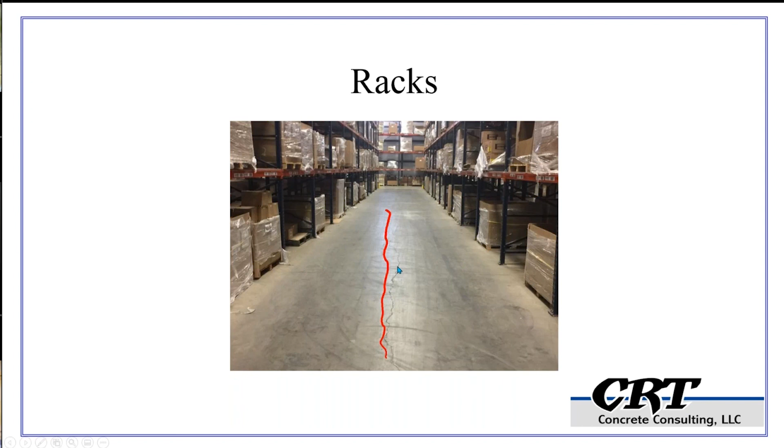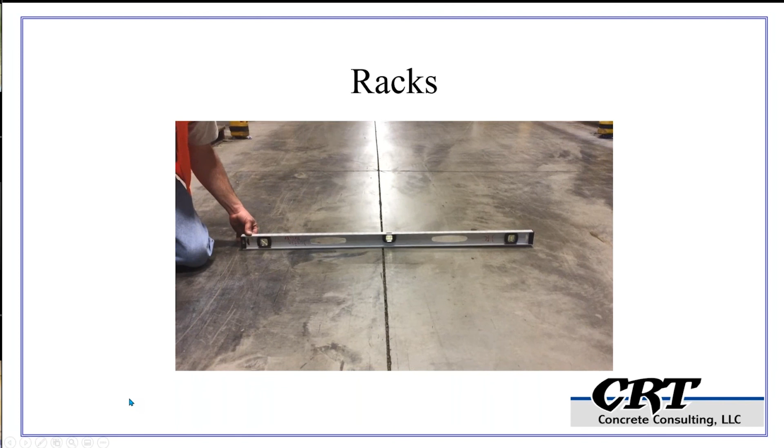But there were some aisles that weren't cracked. Look at this - this one wasn't cracked, but there was a joint in it. Then you put the level on it, and you got a teeter-totter. So it is cracked, it's doing the same thing - it's just that we put a joint there and didn't get the crack. So again, be careful on these big fill sites, be careful on these elevated K values and what you're using, because you don't want to get into consolidation with heavy loads pushing the slab down, creating negative moment on top of the slab. So be careful of that.

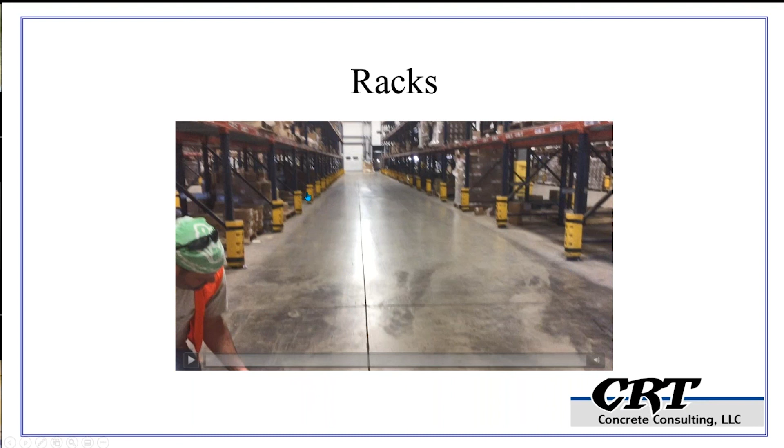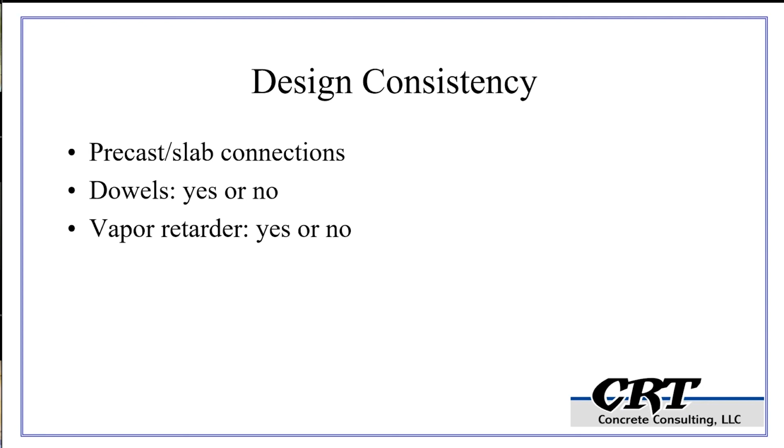Also be careful in design consistency - precast slabs and slab connections, dowels or no dowels. I've had 3 or 4 or 5 jobs where the engineer of record says, hey, I need mesh, I need welded wire fabric in the slab to create enough dead load to handle the thermal bowing stresses. And then I've got a developer who says, thou shalt put baskets in the concrete, and no one's communicating. So I show up at 3 in the morning and there's welded wire mesh going over the baskets. I don't think that's a good idea - that's quite a bit of restraint. So we've got to have some communication and make sure we understand what we're doing.

This has happened to me in Chicago, it's happened in Indianapolis, it's happened in California - we get a lot of these developers or tenants saying, hey, you've got to have baskets. And then the engineer of record says, hey, I need that steel, and we're getting both. So what I like to do in this situation is, if they say you've got to have baskets, we put them inside away from the speed bay, we put the baskets at the saw cuts - they work fine.

I'd rather take this 2.9 and flip it over to some heavy deformed 16 by 16 opening mesh and get enhanced aggregate interlock in the speed bay. So we've got the mesh that's used for enhanced aggregate interlock in the speed bay. It's providing the dead load to handle the bowing stresses in the wall. We get dual use out of that mesh. Again, we take the baskets, put them in the unreinforced slab, and get what we need.

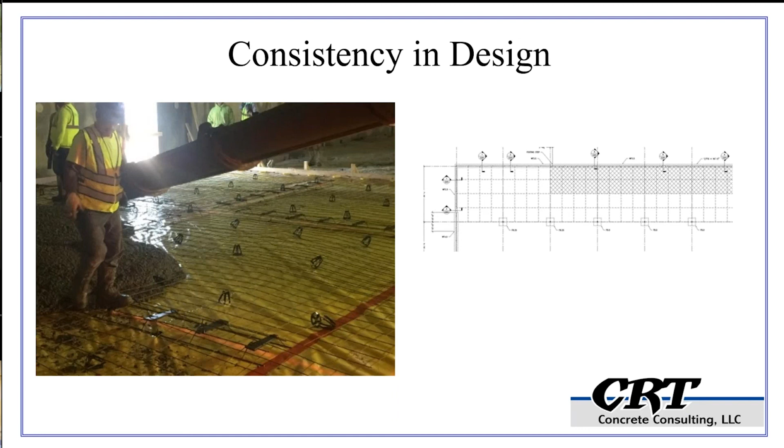So with that, that's all I've got to present to you. I'm certainly willing to answer any questions that any of you guys may have. Chris, thank you. Opening it up to questions.

That's why I think, if you do these things in person, you tend to get more questions. With webinars, you guys are checking your email, doing what you're doing. I know a lot of you want PDHs, and Larry, I think you're going to send those over. Yep, yep. And I'd like to have one for both of those too, if you don't mind. Okay, yep, yeah.

I didn't understand, I'm a residential engineer and call it out all the time. All right, I see that, Eve, on the residential. So the residential code might require you to put the mesh in there. I don't know. What I see in residential is usually 6x6. Don't know that it does anything to the slab, but you wouldn't have dowel baskets in a residential slab. I don't think you're going to have a problem with that in residential.

Mindy, thank you for your nice comment. I see Mindy's comment there. So, all right, don't see anything else coming in.

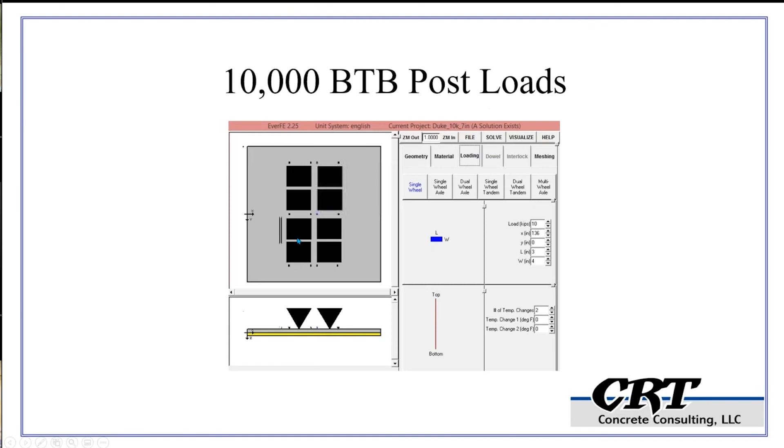Plate dowels work good. If you have a 5-inch slab and you want something at the construction joint, you can use a 1/4-inch diamond dowel, works real well.